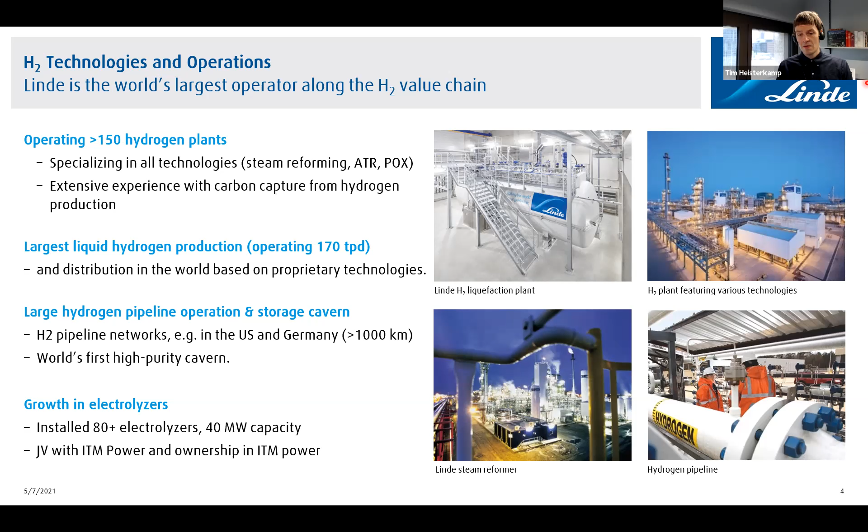And today, one of the questions we have to look into is storage and distribution. Besides the production part and the offtake part, there's a lot of movement, a lot of regulatory topics that have to shift or are currently being discussed. These two pillars, storage and distribution, are key to make the hydrogen economy a success, whatever customer or sector you're looking at. Whether it fails or succeeds depends on how we cope with that going forward.

Now, switching into some of the topics, Phoenix asked me to integrate something that some of you might have seen in the press. When it comes to heavy duty, we're looking into trucks and trains and these kinds of applications within mobility. But lately we've seen small but very positive movement on the maritime front as well, which is why I quickly want to introduce you to a project that we are conducting in Norway with a ferry company, with some partners, Ballard amongst them for the hydrogen and fuel cell part.

That's very interesting to see this happening, because, and I will get into these details later, within the maritime sector we're seeing a lot of developments around decarbonization, around LNG and other technical possibilities to decarbonize these fuels and operations, specifically for the kind of ferry that we're talking about here in Norway, which, as you can see on the right, is basically doing some kind of island hopping in a triangle route.

It's very interesting because we do have a constant payload. We do have a plannable route. We don't go too far out. So all of these criteria can make these maritime projects with hydrogen a quick success. Although I would say the larger ships, when it comes to cruise ships and large cargo ships, are much further away, also in terms of costs.

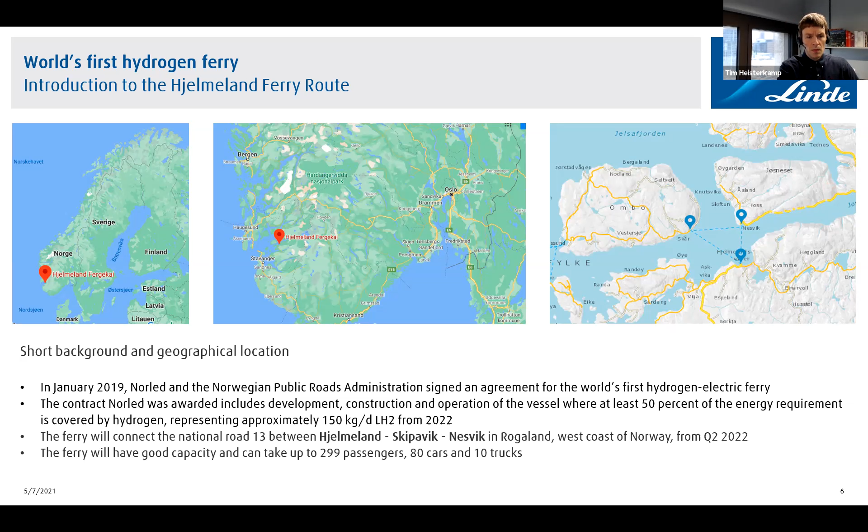However, it's interesting to see some smaller companies moving into this sphere. If you look at the ferry, it's basically a smaller type ferry carrying 300 passengers, cars and trucks that we're talking about here. And interestingly, we had to go through some design challenges. Of course, as I said before, we had to partner up with a lot of companies here.

We were specifically looking into the question, how can we bring liquid hydrogen onto a ferry, also in terms of venting excess hydrogen and all the safety regulations that you have to have in place on a ship. It's even more of a challenge if you put liquid hydrogen on such a ship.

The good thing with these ferries, specifically for liquid hydrogen, is that you don't have a lot of boil-off, basically the liquid hydrogen that is evaporating, because you're on a constant route going in that triangle. So you have a very plannable route, you have a good time for refueling, and that makes these fast-moving projects in maritime very interesting.

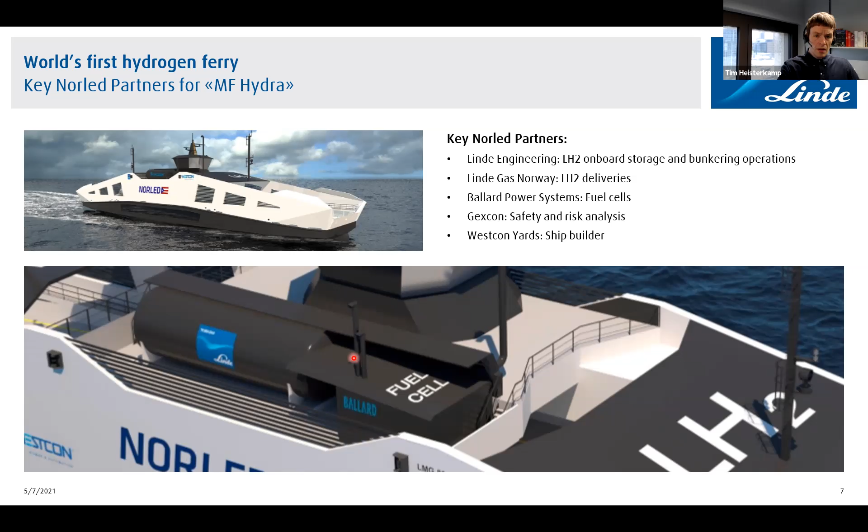And that's what this ship looks like in real life. It's basically being built, has to be finally commissioned, and we're looking forward to taking this into operation and seeing if we can get more hydrogen ferries into operation soon.

So, coming from the maritime now, and as I said, that's one example, but the main trend that we see, and one of the key things I want to go into in a bit of detail, is the heavy duty application area. It is interesting because the industrial gases company and other companies have been approaching the hydrogen topic, the fuel cell topic, very much from a mobility perspective.

But what we did in the past, specifically in European geographies, if you take Germany for an example, we looked at this with a focus on individual mobility. So we're talking cars. Maybe forklifts with hydrogen, but that's not the typical mobility we were looking at. We were specifically looking at cars. And with that came the typical chicken-egg dilemma. I will go into that on the next slide.

But the overall thing we saw in the past decade is that with the cars, specifically in Europe, we didn't live up to the expectations we had in terms of market penetration. We kind of overcame this chicken and egg dilemma, but still we don't have the penetration of cars in the market, which leads to profitability problems within your mobility business cases, because the stations are invested, they're producing cost, and you don't have the throughput because there just aren't enough cars on the market.

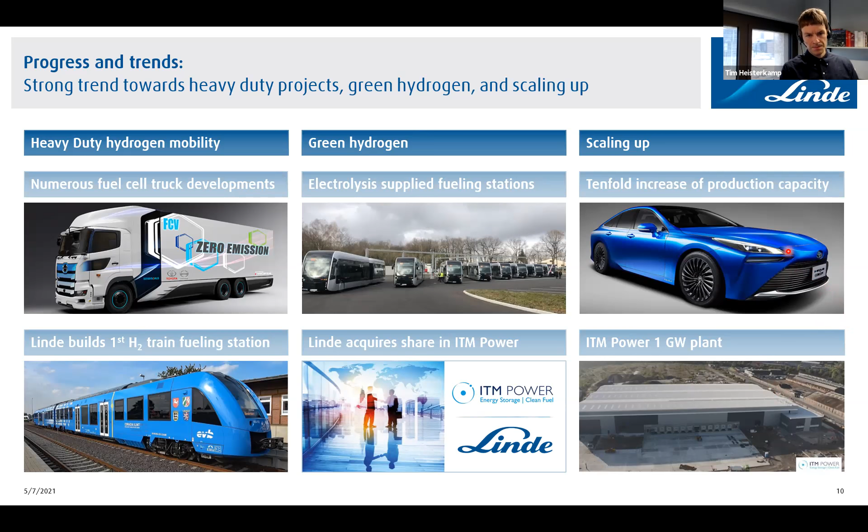Either you don't have any other options, or you have a very, very strong regulatory framework that kind of pushes you into these technologies. But still, we have to bring down the overall TCO for these applications to get them much more into mainstream usage and to scale it up. How can we do this? I think there's different ways and different responsibilities. And it's always the same story.

I think on the OEM side, there has to be a scaling up in vehicles, but specifically looking at the infrastructure side and the gas side, we have to bring down the investment costs for the stations. We have to bring down the cost for the green molecules. Again, this is only happening by volume and by scaling up the production.

Then something that we did is to modularize and standardize the stations. I would say a decade ago, the station production that we did and the architecture was very individual. Now we're talking about modules that you can basically fit and put together, and we started a serial production for these stations, which is always a good step ahead.

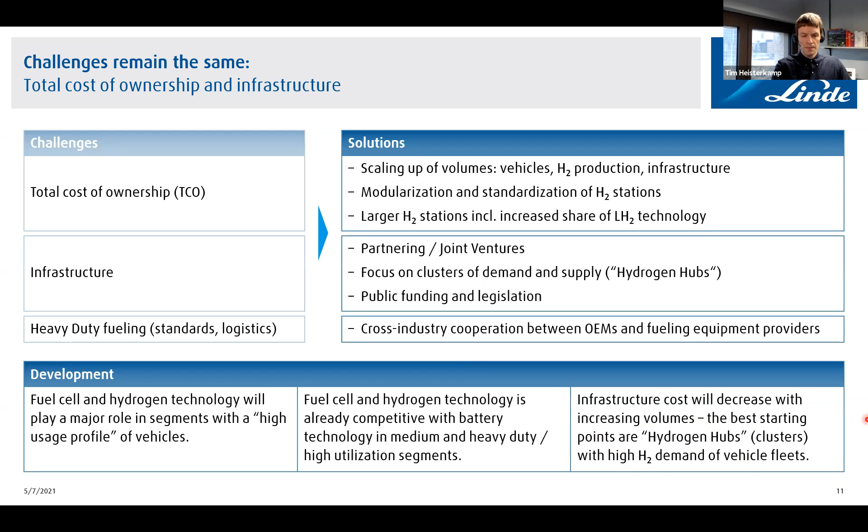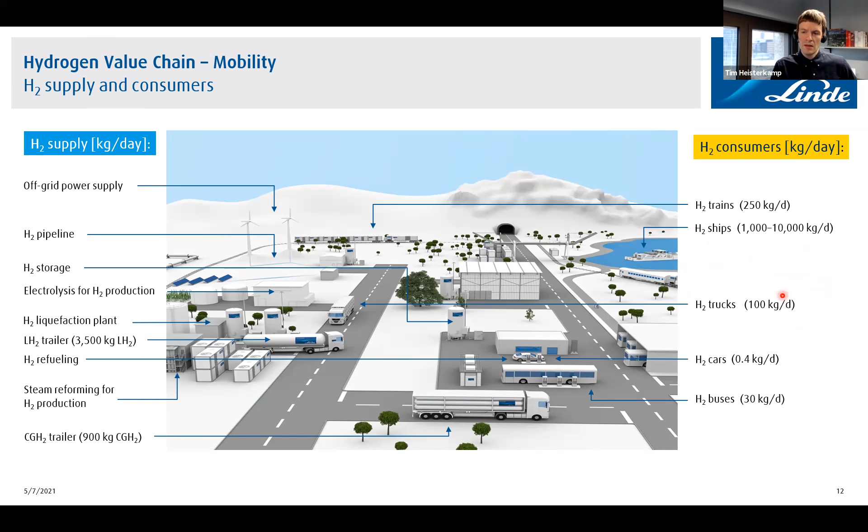And already with buses, you see the higher load per refueling. And that's why trucks are very interesting, and also the trains. For ships, I would say this is very optimistic, and these would be big carriers that we don't see yet. We have to be a bit conservative on these numbers. So with the big ships, I would be a bit more cautious. But the point here is that you see there's a lot of potential in the offtake and the volumes that we talk about in the heavy duty applications.

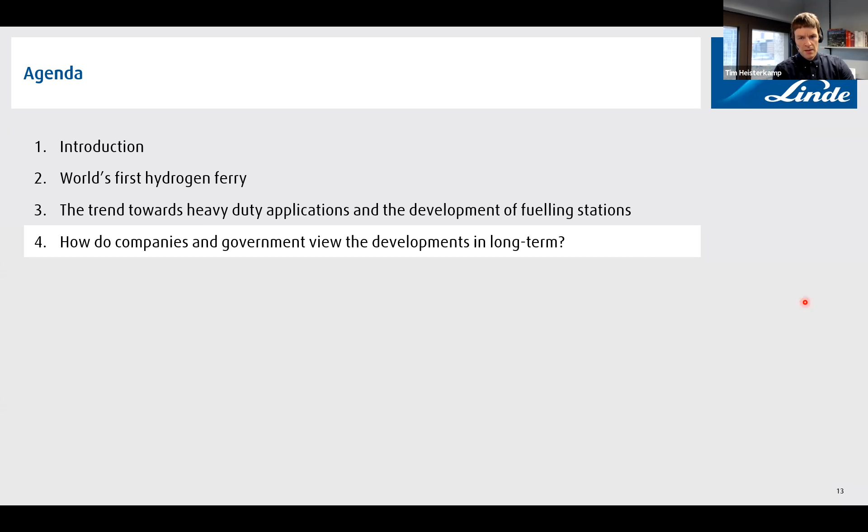So that already leads me to the last part, where I would like to bridge from the applications to the question of where the hydrogen is going to, and how do we get it there? That's part of the discussion that we have today, and the title of the conference is storage and distribution. This is why I want to share this slide with you, to give you an overview of what kind of scale we're talking about, what kind of technologies we already have in place today, and what we are looking at in the future.

So what you see on the top line here is the scale, and these numbers are showing tons per day of hydrogen being supplied. And then in the middle part, you would see different technologies, basically the supply modes, and in the bottom part, you would see the end use segments. So traditionally, with very small amounts going into labs and testing and these kinds of processes, we're talking about the classic gas cylinders that all of you know that we also use for oxygen.

The interesting part when we look into creating a hydrogen economy starts around here, where we're talking about bulk GH2, that's gaseous hydrogen, and liquid hydrogen, bulk LH2. So the industry feedstock, which is the chemical industry, steel making, glass industry, food industry, we can easily trail in or truck in gaseous, compressed, or liquid hydrogen. The same is true for the hydrogen fueling stations.

But once this kicks off, and we're talking about the range of 10 to 100 tons per day, we are already talking about on-site production. That would in this case mean that we have a production asset on site. And you will see this, for example, in refineries. You might even see this in some cases with refueling stations and heavy duty applications, where we have an electrolysis plant, a processing, purification application, and some kind of storage at the site where we refuel.

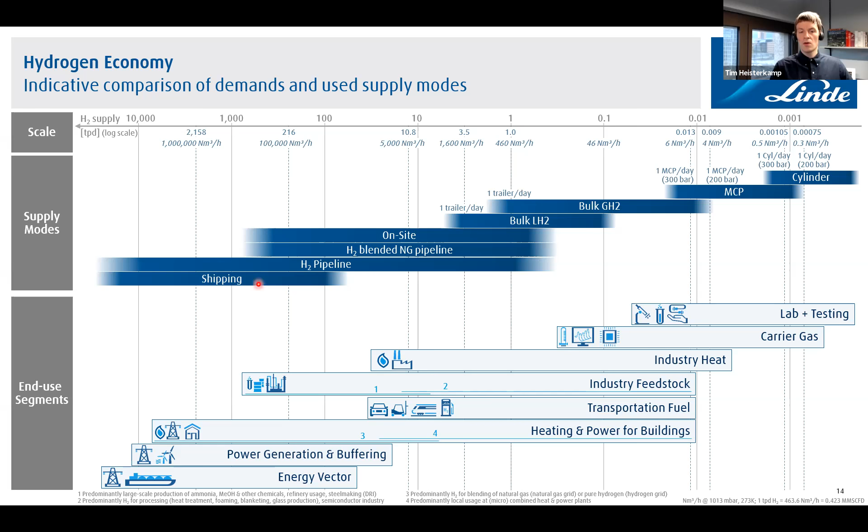So as I said, I think this column of the overall value chain, and I'm not going to go into the details of the production, processing, applications, that's something we've talked about here, specifically the refueling part. I think this part here really is key and has to be in place in terms of regulation, in terms of costs, to make this system a success and to pave the way for an overall hydrogen economy. Because you have to have these storage capacities and you have to have a pipeline network in the ground. Another thing that we are specifically looking into to make the deliveries more efficient is the liquefaction part. So I want to quickly jump into this.

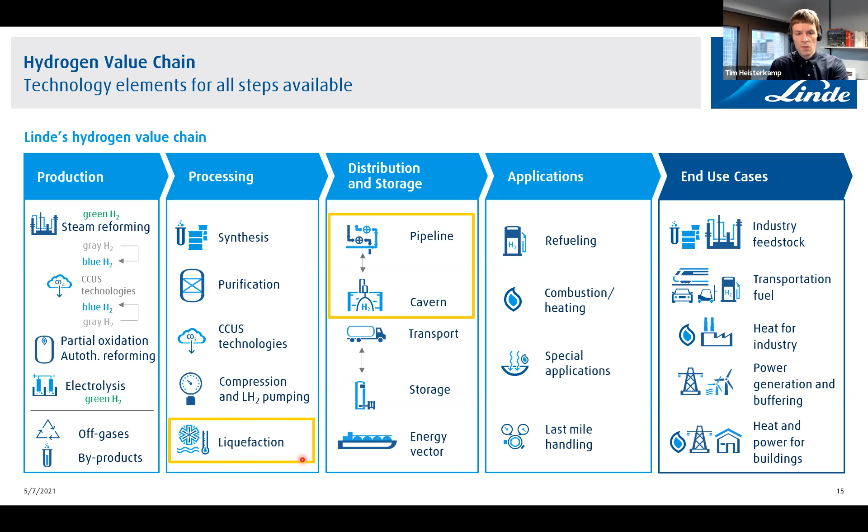We can deliver to a station. The station doesn't have to have so much energy going into the cooling because the gas itself is cryogenic. It will only be evaporated by becoming warm and can then directly be pumped into the car. So there are certain advantages to the liquid hydrogen part in terms of efficiency and energy density on this side as well.

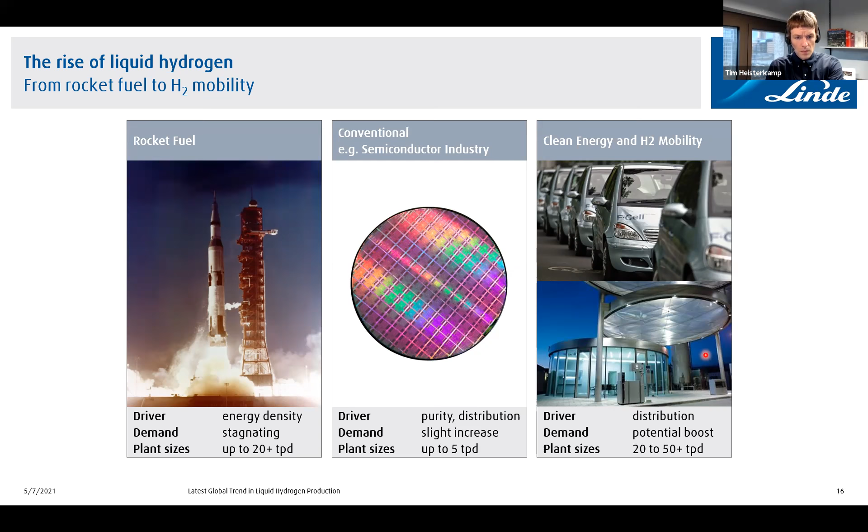Just a quick outlook on where we stand in terms of liquefaction capacity, because that could become a potential bottleneck as well. Just some brief numbers here. You see a lot of liquefaction capacity due to the space programs that we see in the US today. The red bubbles that I'm showing here are the planned capacity that we want to invest or others want to invest. So I think this is something that you always have to keep in mind when we're talking about liquefaction.

When we're talking about liquefaction also in parts of Australia to bring, I don't know, liquid hydrogen to Japan or other countries in terms of importing and exporting hydrogen, the capacity for liquefaction could become a critical point.

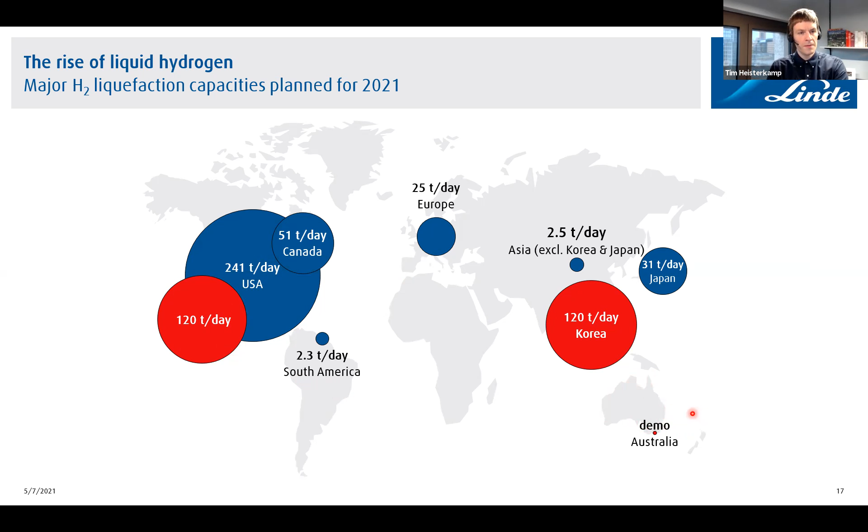More interestingly, I think, and I copied this out of an EU publication, is the overall idea of having this, and the EU calls this a hydrogen backbone. I think it's very interesting. And you can basically transfer this to any other region of the world. But it's strongly being pushed by the governments here in Europe to create some kind of network to basically copy the natural gas grid that we see in Europe, but set this up for a hydrogen economy. And I think that's the right way to go. It's going to take some more time.

The approach from our point of view could be twofold: to first start using or refitting natural gas grids. There's a lot of capacity becoming available because the fields in the Netherlands, for example, are running out of supply. The second step has then to be to develop and do new investments into a pure hydrogen grid. And you will see this covered by most of the hydrogen strategies in Europe.

Some points, just briefly, that I heard out of the discussion that have to be solved. The financing, I mean, who's going to invest? That's a chicken and egg dilemma. Maybe the state has to step in partially for this as well. But also the technical specs, these discussions are still to be done.

And in connection to the purities and the technical specs, we do see a lot of liabilities that have to be taken into account. To give you one example, in the natural gas grid, we're talking about percentage purities or impurities. When it comes to a pure hydrogen pipeline network that has, for example, chemistry customers or off-takers, we're talking about ppm, parts per million purities. So it's a different world in terms of purities. With safety and materials, it's quite complicated. I don't say this is not to be solved, but it's something that we have to take into consideration.

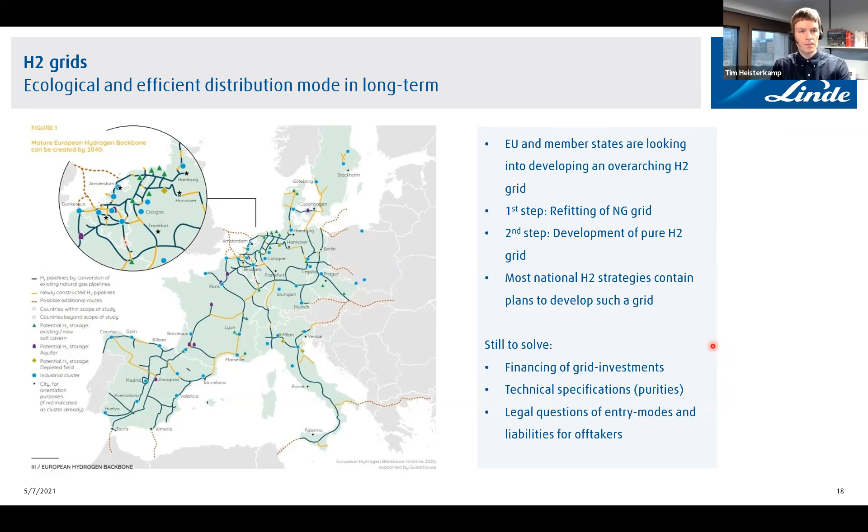And last but not least, just a quick outlook on what we think is also key for storage beyond trucks, beyond tanks, and beyond liquefaction: caverns. I know there's always a geographical limitation, and in some geographies we also see a regulatory limitation. But we have been running such a cavern, a huge cavern in the US Gulf Coast, for more than 10 years, very successfully. Of course, a very high initial investment has to be made for the mining and exploration part. But once this is set up and you have the cluster allocated around, you maybe even have pipelines connecting your customers with that cavern. You have pipelines connecting the production facilities with that cavern.

It's, from our point of view, the most elegant and efficient way to cope with supply and demand changes, and also to do the buffering and storage part, because this cavern can specifically take out the volatility that we see within some of the renewable energy production, transfer the electricity into hydrogen, either use that hydrogen as a feedstock for the industry, or, if you want, re-electrify and put it back into the grid. So there are endless opportunities there.

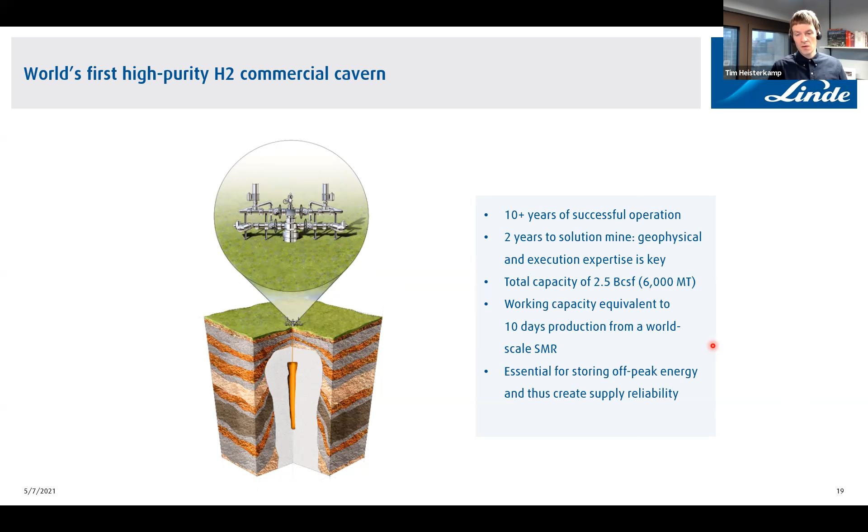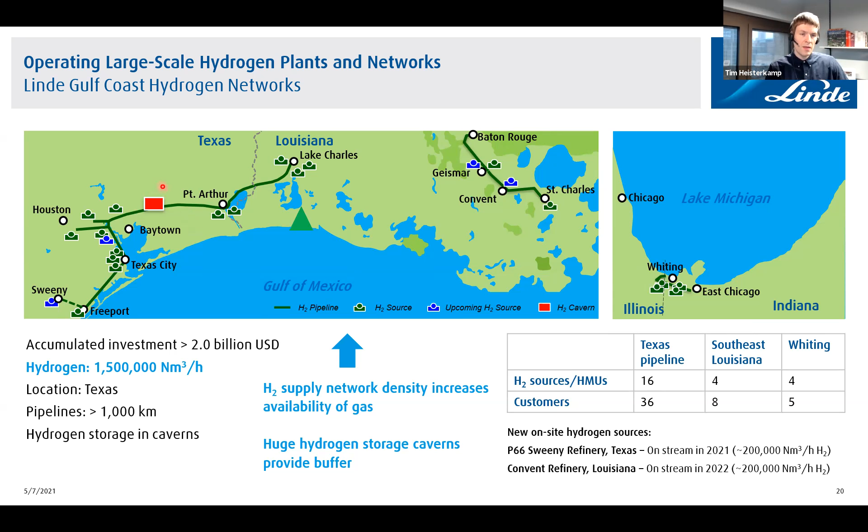And I think that's the ultimate way to go if we're looking at some kind of overarching hydrogen economy with all the different elements in that. A cavern or cavern storage, wherever possible, I think is a great thing to do.